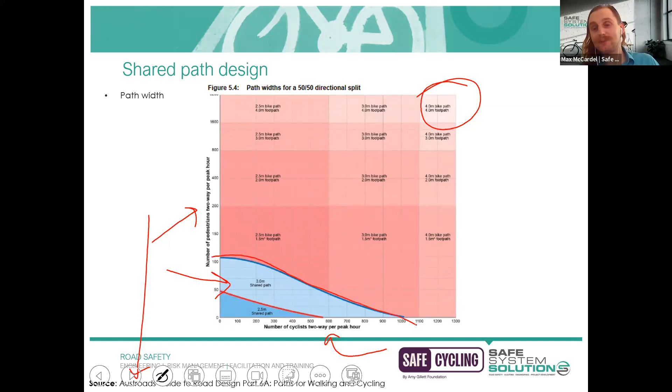Unfortunately, the Austroads Guide does a pretty terrible job at actually succinctly defining what each of these paths look like. There's some generic cross sections which provide some dot points, and I'll go through that, but it really is a little bit open to interpretation. It's not quite as tight as, I've got an engineering background, so I like things to be a bit more unambiguous.

But the local access path, in layman's terms, just think of it as your local streets. If you're considering your road network, it's basically only going to be used to support movement within a local context. So you're not connecting significant corridors, you're not having a large throughput of shared path traffic there. It's likely only going to be for residential use in that specific area.

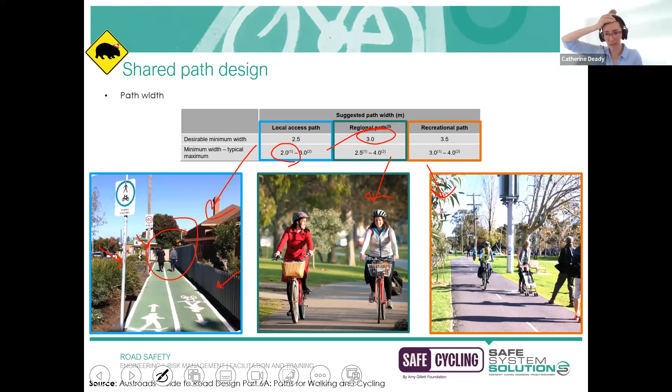Do you know if they do that, Catherine? Do the bicycle detector loops do that? Yeah, I'm not too sure around intersections. I'm sure there are - I mean, we've got obviously the detector loops to detect whether a cyclist is there at an intersection to trigger the bicycle lanterns. But I know MetroCount do a lot of the tubing, permanent tubing, for off-road facilities, so for shared use paths. I'm not too familiar though of them being in the carriageway, so it'd be good to know.

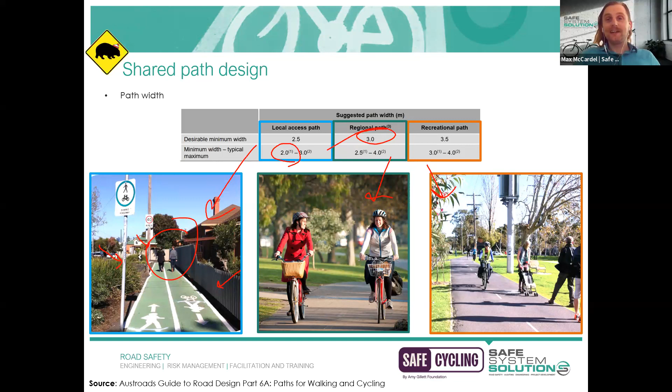Right, okay, got some interesting feedback in the chat as well. So thank you for helping shed some light on that. Thanks, everyone. And that's it, Max. I'll let you carry on.

Thank you very much, Catherine. So we'll get stuck into the gradients now. Once again, this is a figure from the Austroads Guide. And what we're actually looking at is what would be considered a reasonable uphill grade for a rider.

Myself, if you've read the introduction on the LMS, I don't like hills at all. I don't like riding up hills. I will go out of my way, I'll pick a flatter route, even if it means another 15, 20 minutes to my journey, because I just do not have the stamina or motivation to tackle hills. Lots of riders are very different in that regard, but I take it quite easily.

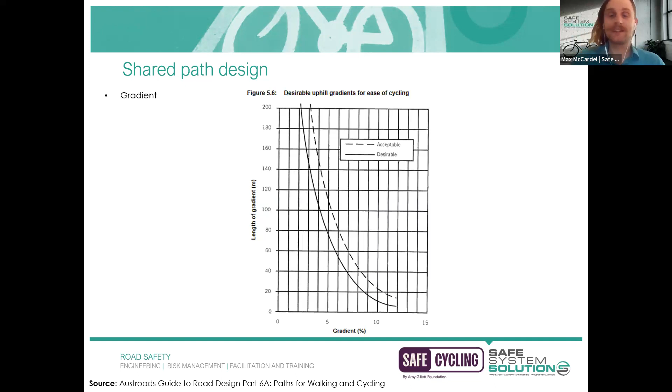This graph basically represents my sentiment, which is how steep can shared path facilities become, and how long can you make that facility before riders just won't use it and it's not worth doing, or you should be looking at flattening that out. The way that we read this is we've got the length of the gradients - the gradient is just the slope, the steepness. Along the X axis, we've got the gradient as a percentage.

I'll just pick one as an example, and I'll say a 10% gradient - that is really, really steep. Like you would notice that even driving a car, 10% gradient is very steep. If we had a 10% gradient, what would be deemed desirable would be to limit that to about 10 meters there. So that desirable line there is the solid line. What may be acceptable is that dotted line, which looks to be around 25 meters or something like that. So that's just giving you an indicative range of how riders would actually feel going up a 10% grade and how much you should limit that, because you don't want to make it too far - riders won't use it, or they have to get off their bike and push it up and things like that.

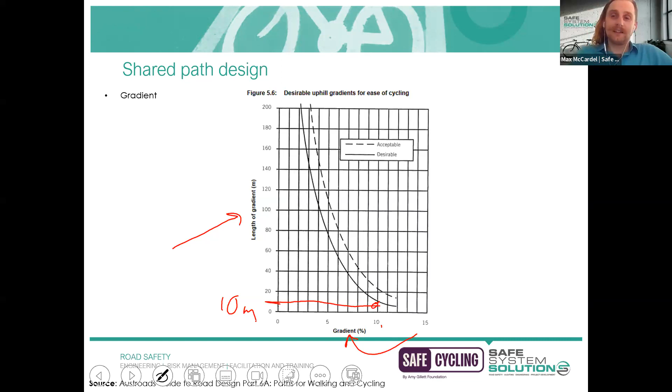That is, of course, thinking about uphill grade, but we also need to think about, well, if it's a shared path, it's very likely that riders will be accessing that in the reverse direction, which could be traveling downhill.

I've given this example here, and I'll give you a chance to provide your feedback in the chat. The question I've got, this is an overpass structure.

Riders travel along here, and if you put yourself in the position of a rider right at this point, just at the top of that ramp, they're going to head down this ramp to continue the shared path.

What are some of the risks or hazards you can see in these photos that may increase the risk of a collision? I'll give you 30 seconds to have a think.

Think about what are some of the risks or hazards for a rider about to set off and ride downhill in this environment. Pop it in the chat, please.

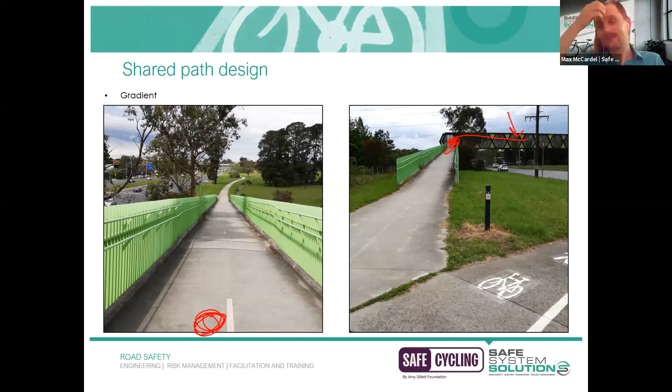So the ramp, if I was to draw this in cross section or elevation profile, it kind of looks like you've got the ramp that goes down, then a landing, ramp, landing, ramp, landing, like that. That's obviously exaggerated.

The reason we do this is for our DDA requirements. We need to provide those for people in wheelchairs so that they can safely access this feature.

Some riders think that significantly affects their ability to travel within there, and yes, if you are riding at speed, it is relatively uncomfortable.

But that's the other point I really wanted to make: if you were at the top of that ramp and just let your brakes go and let gravity take over and push you down there, it's very likely you'd pick up pretty significant speed.

You'd probably be traveling like 25, 30 kilometers per hour by the time you got to the bottom of the ramp, by the toe. A few other people have mentioned that we've actually got a conflict here.

We've got a conflict point here because we've got another shared path that actually joins in at this location. That's not great design, really, because where you've got the conflict point, you don't really want to have those high speeds.

The other issue with this location, and I've also seen this mentioned, is because you've got this lovely facade being used for the handrail there.

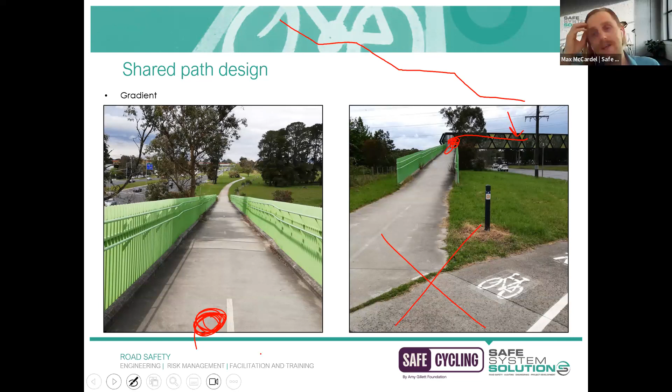That actually acts as a sightline impediment. So as you're riding down, it can be quite challenging to see a rider that could be accessing the shared path adjacent.

It's difficult to make eye contact with them, and also a bit confusing as to who gives way, who's got priority.

So all of those factors lead to this: you've got high speeds, you've got the confusion of priority, and it's difficult to see other users at that conflict point. This is a significant concern.

That is just a testament to thinking about things not just from how riders experience things going uphill, but how they experience things going downhill, which is often overlooked.

This one we actually audited as part of the construction of this project, and it looks different now. A recommendation was made to actually move that conflict point further out, where sight lines are much more open.

Where you've got much reduced speed, because you're no longer putting the conflict point where riders are right at the bottom of the downhill where they've got all that speed.

You're putting it somewhere where they've managed to wipe off some of that speed. So those are just ways that you can look to mitigate that, making sure you've got your sight lines set up and hopefully reducing your speeds.

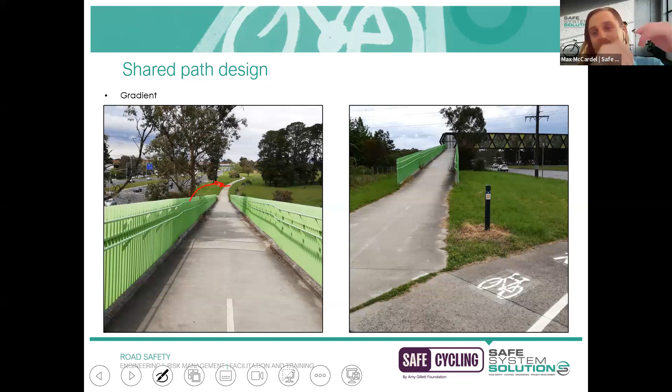Now I'll have a chat about our cyclist envelope. Just like in traffic engineering or road design, we have envelopes for general traffic, heavy vehicles, buses, B-doubles and so on - by envelopes I mean the width they need, how much space they require. We also have that for riders. The operating width of a rider is conveniently taken as 1 meter, so it's pretty easy to remember.

However, there's a note that if a rider is traveling uphill, they're likely to take up more width, because it's common for them to wobble their handlebars left and right to get momentum up the hill. So that operating width may extend to 1.5 meters, but generally as a rule of thumb, the 1 meter operating width is used.

In terms of clearance - the head clearance from the top of the rider to a fixed permanent object - 200 millimeters is used. This is from New South Wales; depending on jurisdiction, others may use 500 millimeters, so there's a bit of discrepancy depending on which part of the country you're from. Where this is most relevant is scenarios like a shared path going underneath the carriageway, an underpass type situation, or even vegetation and branches overhanging a path - that measurement helps identify any risks there.

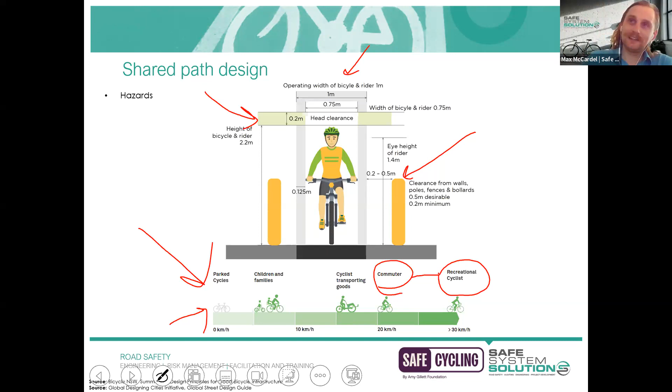Back to hazards - I mentioned that 0.5 meter offset from the edge of the rider's operating width. Looking at the right photo, in practice it can be difficult to say exactly where the operating width of a rider is on a shared path. The way we tend to measure it in practice is we take the edge of the shared path.

Anything that's within 0.5 meter that's fixed, that's rigid, that could be a snagging hazard, we consider that a risk for our riders. So this utility pole that is conveniently masked by vegetation is in a precarious position for riders, because if a rider loses concentration and strays off the path, it's very likely they would strike it or hit their handlebar and snag on it, potentially causing injuries. That's how we measure our half meter to determine if it's a hazard or not.

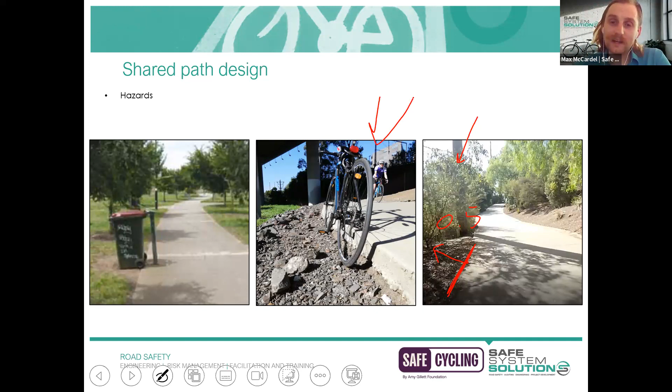Some other really common hazards we see are drop-offs. This is an example of a concrete shared path that's been installed. Likely the contractors used formwork to get the concrete nice and level, then took away the formwork and that's it, job done. Unfortunately that leaves a drop-off where riders who come off the path are very unlikely to safely access it again. Instead, we recommend always battering up to the surface, meaning using soil or fill material to build up to the top of your concrete path so there's none of that drop-off.

I've done this the other way, started from right to left. But anyway, the left-hand photo now is a bin, which is also regularly found across recreational paths. A really good example of where we could have done some analysis and thought, well, maybe I'll put the post on the other side here, just to give riders a little more leeway so they don't have to worry about that one as a hazard.

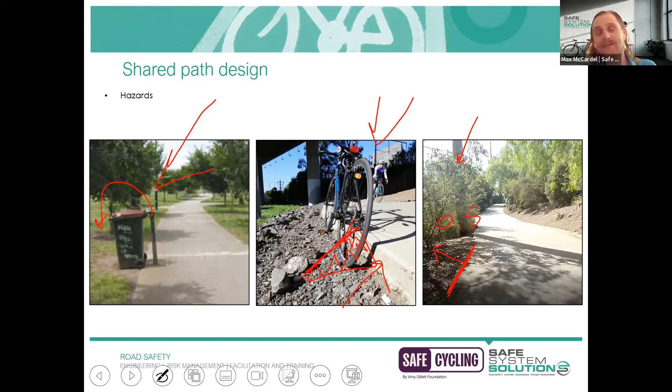Taking into account the hazard I looked at with the utility pole, a way that we could treat that—if we're able to remove that as a hazard, that is our primary approach. If we look at how we mitigate risks, anything that removes the hazard is considered the best outcome. But it's also not uncommon to apply flexible bollards or use line marking just to help demarcate that there is a hazard there.

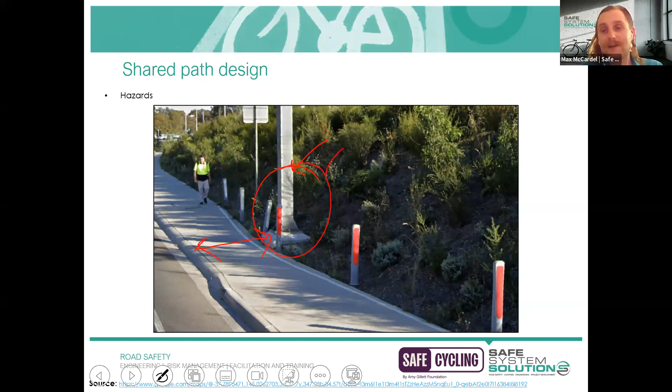This is another example where the shared path is narrowing due to this gantry sign post that hangs out of the carriageway. Once again, in an ideal world, during the design phase you probably would have picked this up—the shared path has to narrow there—and thought, well, let's push this feature into the embankment and build some retaining walls so we can keep that nice consistent width. But if you're working within environments where you're just retrofitting and trying to make things a bit safer, these flexible paddles or any delineation device help demarcate that.

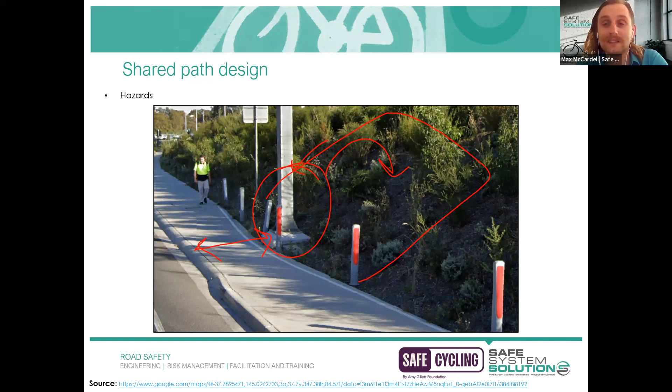We'll move on to sightlines now, and I've put this little slide in here for those who are in the design space, and perhaps you've done your sightline calculations for other modes, like stopping sight distance for general traffic or minimum sight gap distance, all those fun calculations. So just wanted to make you aware there are sightline calculations for riders as well, and it's a very similar process for how the calculation comes about.

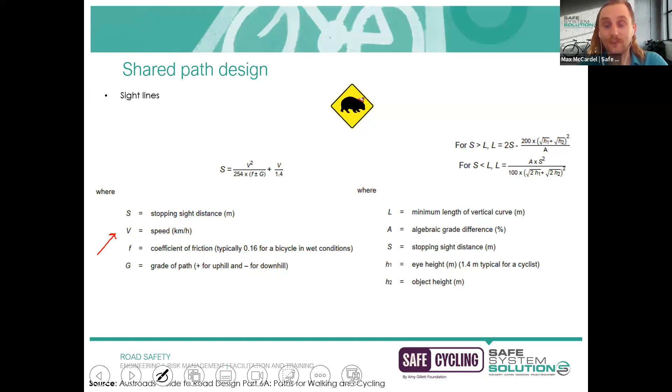You need to know or make assumptions about your rider's speeds, take the worst case scenario for friction, which is during wet conditions, and then the grade of the path. This gives you your horizontal sightline requirements, so you can determine how far a rider needs to see in advance to spot a hazard, and how much space you should provide adjacent the shared path and remove obstacles to ensure that sightline check is maintained throughout a shared path corridor.

Anecdotally, these checks tend to be done at the highest risk locations, maybe like hairpin bends and things like that, and it's pretty common that they're not met. So you'd have to think about what else can I do to help, if I'm not going to be able to meet sight lines, what else can I do? Maybe that's slowing down riders.

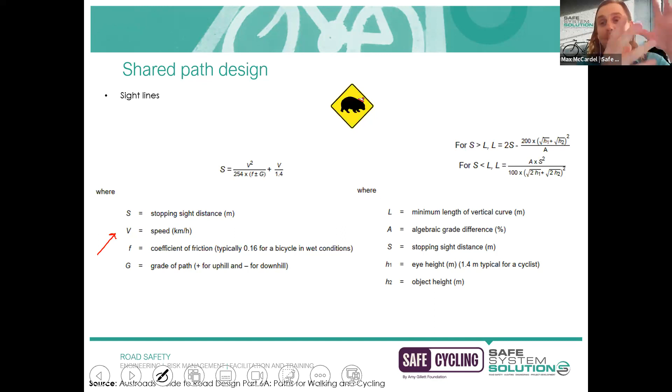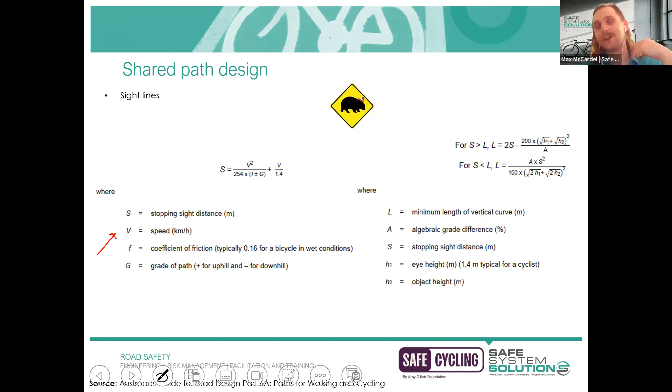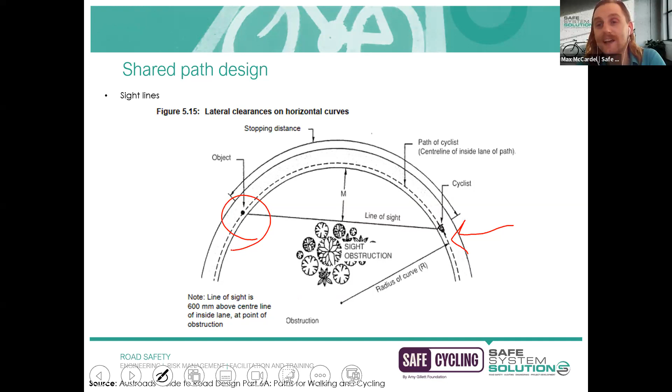But just to talk about this against a figure instead, to give you more appreciation of what I'm on about with sight lines: if I've got a rider traveling on a shared path, I could have a hazard or object blocking that shared path. It could be a log that's fallen down, or another rider that's fallen and injured themselves. What we don't want is insufficient space for the rider to emergency brake and stop prior to colliding with that hazard. We want to ensure the sight lines are there so they're able to perform that safely.

So if there was a significant hazard occurring around here, a rider could be traveling along and only spot it halfway around the bend, limiting their ability to stop in time. So they might have to run off the path or collide with that hazard. That's the reason you're doing this check, just to ensure that you've managed to mitigate that as a risk.

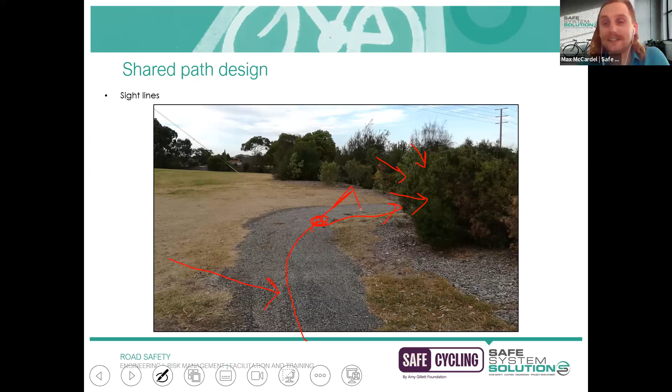I'll spend a bit of time now on fencing. We'll talk about two different types of fencing categories, referred to within the Austroads Guide as a partial barrier fence or a full barrier fence. We typically apply them either when we've got a significantly steep drop-off, like a vertical drop, or there's a really steep batter, like a cliff.

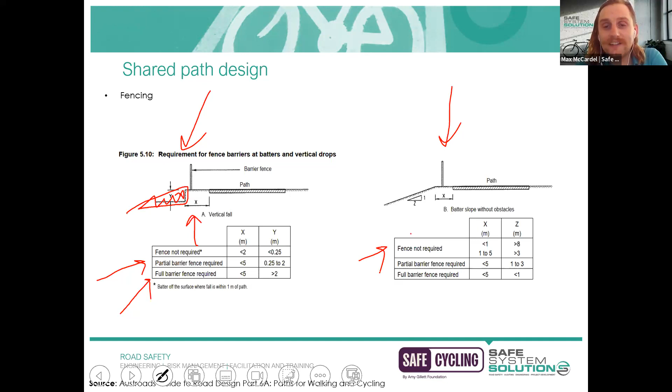Similarly, I'll run through how we read our battering fence requirement table. A fence is not required where X is less than 1 and Z is greater than 8. Z is referencing the run. For those who remember their gradient calculations from high school, or have done any batter calculations, you know it's a rise-over-run terminology, usually referred to as a 1 in 10 grade or similar.

Basically, if it's greater than 1 in 8, it's pretty flat, so don't worry about putting in a fence. A partial barrier may be required where Z is 1 to 3, and if it's 1 to 1, that's very steep, then you would require a full barrier fence.

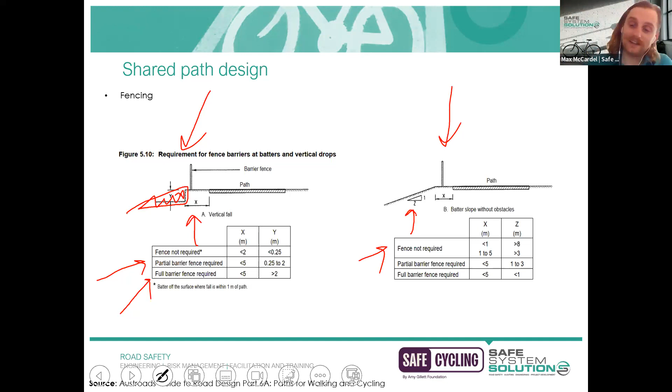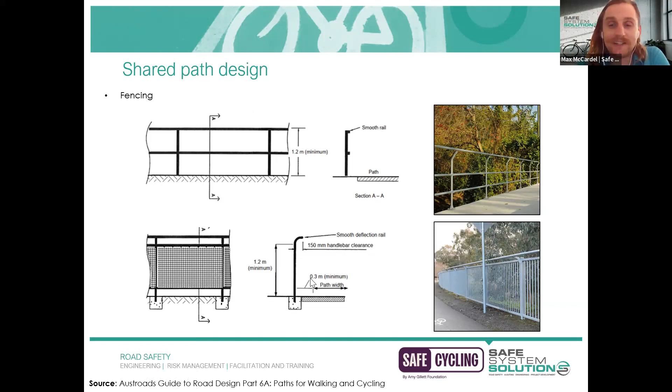The other thing that's really crucial within any fencing design is this smooth rail, which you can see listed in both cross sections as the smooth deflection rail. This is a deliberately installed continuous rail that juts out in front of the fence, so riders' handlebars don't collide with any of those vertical members or brackets. In fact, it's designed so that for a rider on their bicycle, that smooth deflection rail sits at the height of a rider's elbow to shoulder. This means that if they were to come off the path and collide with this feature, that part of their arm would hit the fence, making it much more likely they'll stay on their bike because their handlebar isn't snagging.

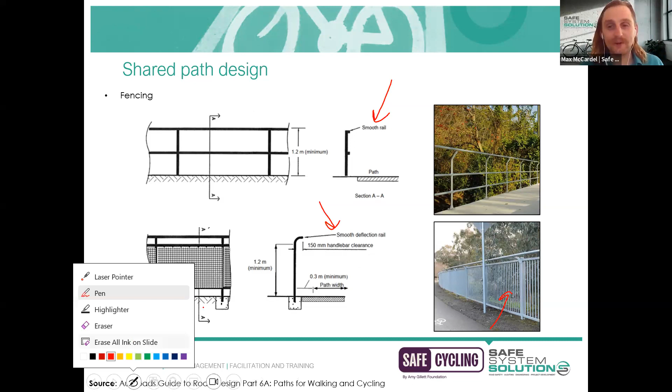So very important: any fences that you're proposing adjacent to your shared path would have that smooth deflection. I saw it in the chats, but note here that the sign has been installed on the inside of the path, meaning theoretically, if you were riding and collided with the deflection rail, it's basically going to guide you straight into that pole, which is not a good outcome. So if you're doing this type of work, just ensure that sits on the outside of your fence, so you don't have that pinch point for riders. Give a prize out there for the person that noticed that - that's good eagle vision.

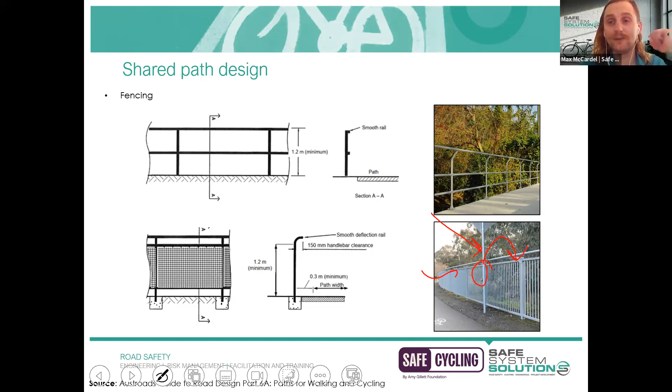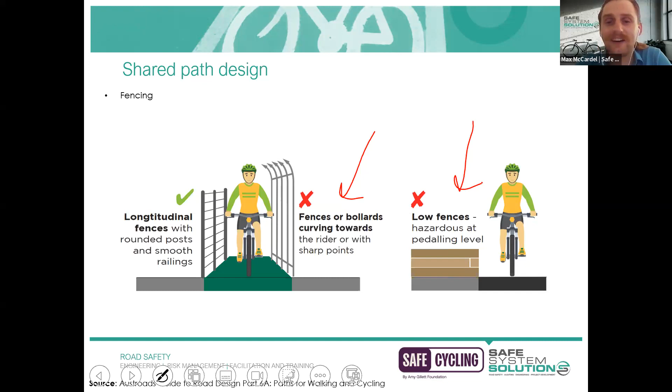Now, longitudinal fences - we've already spoken about this, this is just more of a figurative way of looking at things. We don't really like to see any fences that curve inwards. They can also have that head clearance issue, and anything sharp, obviously. Low fences or things like planter boxes can actually create a pedaling risk where riders' pedals strike that. Anything above 200 mil could become a pedaling risk. So be mindful, if you've got any of those low features, they could be considered a hazard as well.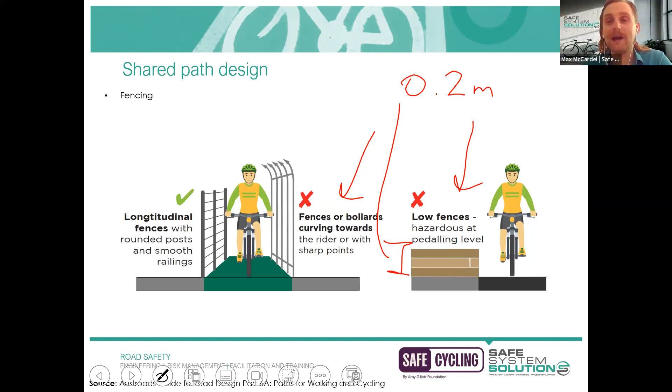I also saw a question in there about the shy line effect. Was that you about to ask that, Catherine? Yeah, that's it. I stole it from you. Oh no, all good, you go for it, Max. It's a good question, hey? We'll give a prize out there as well for the shy line effect.

So what that refers to is - maybe I can draw it on this image - if I was riding close to the edge of the shared path near the fence, it's very common for riders to deliberately position themselves further away because they don't like the feeling of getting too close to this feature. We have the same phenomenon with drivers when a roadside barrier is installed too close to the edge of the traffic lane - they tend to position themselves over towards the center line more. Same thing happens with bicycles. The way you mitigate that risk, similarly to what we do with roadside barriers, is by providing a splay. So a splay would mean - pretty difficult to draw on this image - but if you had a shared path that looked like that, and that's the fence you're proposing, at the start or end of your fence you'd splay it so it looks like that. It provides a more comforting angle for riders. Great question though.

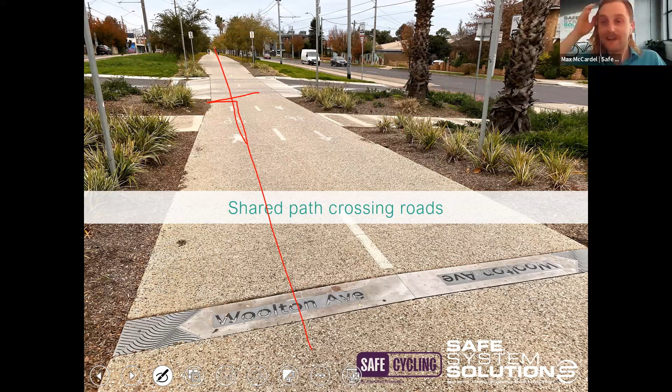So if you're riding through this section, you're not forced to pause and give way to traffic — you've got one continuous stretch. This is about a 2-kilometer stretch of bike path that looks exactly like this, and at every opening you have that continuous riding facility, so you're not forced to yield. In other sections you are, but not this one. I think that's a wonderful way to design it — provide continuity for shared path users, because it's much easier for vehicles to slow down and give way than for riders to do so. It's cumbersome, and some riders may try their luck while others just decide to use the road because it's too inconvenient.

So I've got two other examples here of shared paths crossing over roads. I'll call this one example number 1 on the left, and example number 2 on the right. I prefer example number 1. They're both raised crossings, and both give priority to shared path users, but my preference is example number 1.

I'd like to hear in the chat why you think I'd recommend configuration number 1 over number 2. Have a look at both examples and pop down your thoughts on what could be considered more or less risky in either of these. I'll give you 30 seconds.

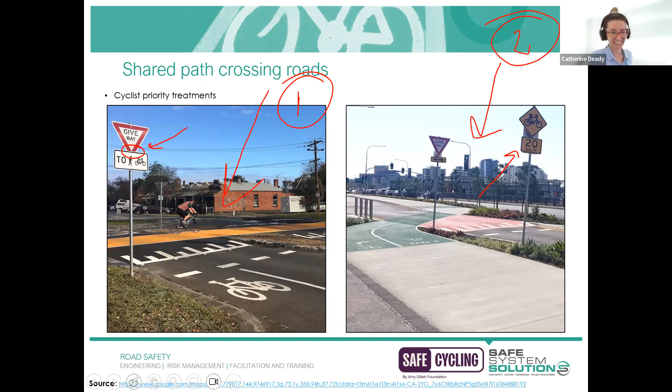Good to have that feedback. So yeah, the way things look — two different jurisdictions, as I mentioned before. The one on the left is from Victoria, the one on the right is the Brisbane Bicentennial Bikeway. Two different states doing different coloured treatments and things like that, so I wasn't focusing so much on that.

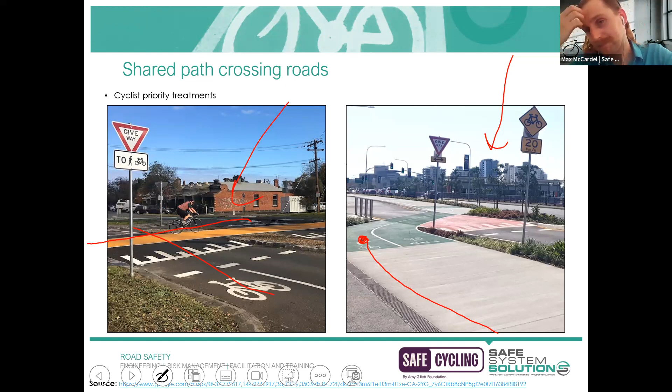So if you are able to construct your conflict points at perpendicular angles and really open up those sight lines, that's definitely the recommended, the go-to approach. Now, I'm not trying to throw any shade at all to Brisbane or this bike path. I know this one quite well, and they've done lots of exciting things. I know in this particular environment they've got lots of different constraints, so I didn't want to say this is the worst thing ever and you can never do this. I just wanted to show why those sight lines can play into how effective these types of treatments are. But they both principally do the same thing of awarding priority to shared path users.

Okay, now another thing that we commonly see where we have shared paths crossing over roads is, of course, bollards. Bollards are fixed hazards that are placed on the shared path or adjacent to the shared path to deter vehicle entry. There's lots of different configurations out there as to what bollards may look like. Where you've got really tight restrictions like this, they tend to be installed where municipalities or LGAs are concerned about things like monkey bikes or dirt bikes entering that environment.

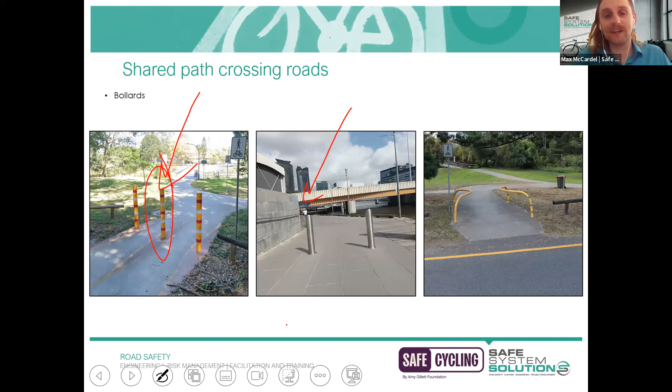The other thing that I really dislike about these ones in particular is they are well and truly away from the carriageway. The reason these have been installed is to limit maintenance vehicles, so maintenance vehicles don't go any further. They can come and pick up a bin that's located over here, but they don't go any further. I just think a much more elegant solution is, rather than have these installed here, just talk to the contractor that's doing this and ensure they've got it in their SWMS, or how they operate their standard practices, that they're not traveling beyond their scope, or even geofence their vehicles so they're unable to access any further. We've got this technology. But anyway, bollards seem to be a really, really common way to just quickly put up and call it job done.

Banana bars in Brisbane, as far as I'm aware, are being ripped up. They're no longer being installed, and they're getting taken away because of the kind of pinch point awkwardness there for riders. Not a great outcome at all.

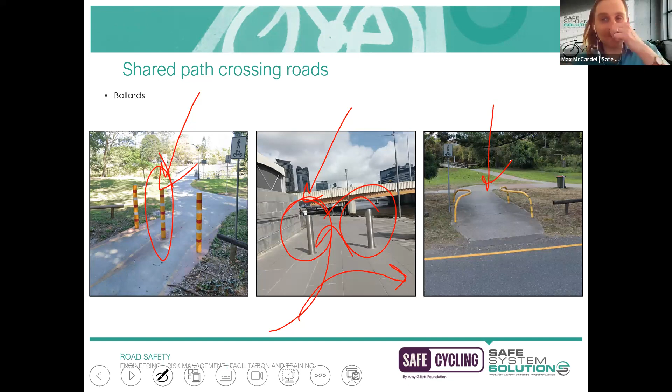A few other types of bollard treatments, things like timber bollards. Once again, you've got that blending in with the surrounding environment.

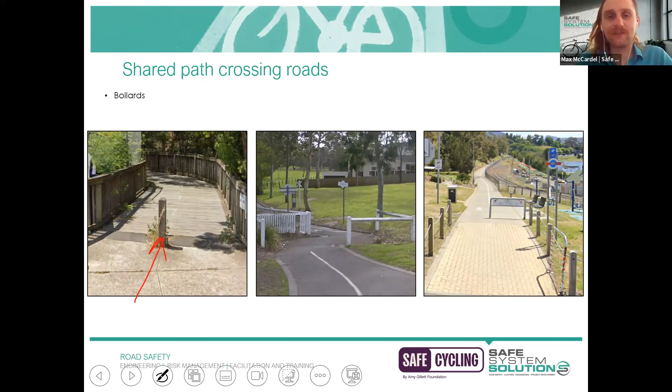You've got this type of treatment, which is kind of... I forgot the word. If anyone knows the word for it, you get a prize immediately. It's the chicane. Thank you. We'll give a prize for that.

That's excellent, a chicane type of treatment, which does a really, really good job at slowing down riders and making them aware that they're coming up to a carriageway. It does a wonderful job at preventing vehicle entry. The issue I've seen with the installation of these chicane treatments is sometimes they can be quite narrow, like the gap in between those two transverse bars there.

And for those who use cargo bikes, or bikes with a trailer, riding with your toddler or your pet dog or whatever it is, those kinds of larger bikes can actually have difficulties traveling through these types of things. So it's just something to be mindful of.

Another common one, this one's in Hobart, is the use of U-bollards, once again just indicating that riders are coming up to a carriageway and to be mindful, but also creating this pretty awkward pinch point.

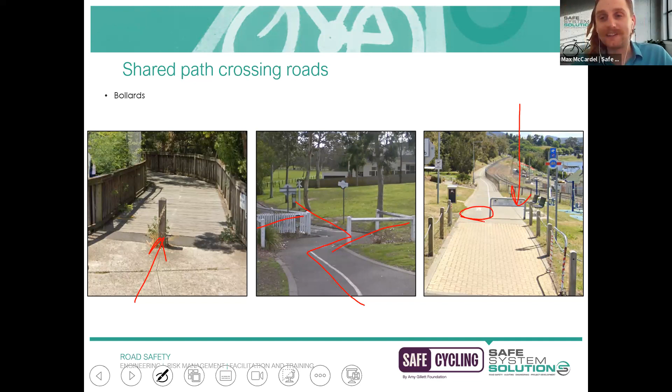Anyway, I wanted to put into a bit of context why I'm talking about bollards so much. This is a photo of a bollard that was installed on the Upfield bike path, which is right near our office. This was many years ago now, or 4 years ago now.

And that was what it looked like prior to this fellow riding into it. After he rode into it, a few days later, council went out and gave it a fresh paint job and some new tape. You can even see the fresh paint on the pavement there.

Anyway, Andrew here, he rode into this bollard on his way home from work, and he suffered facial injuries and broke his arm in 3 places. As he was waiting for the ambulance, he called for urgent treatment.

As he was waiting, which took about 40 minutes, he witnessed 3 other riders hit that same bollard in that period. We have a police report for one crash because that rider went to hospital, so we do have a record of that occurring. The other crashes we do not know occurred other than anecdotally.

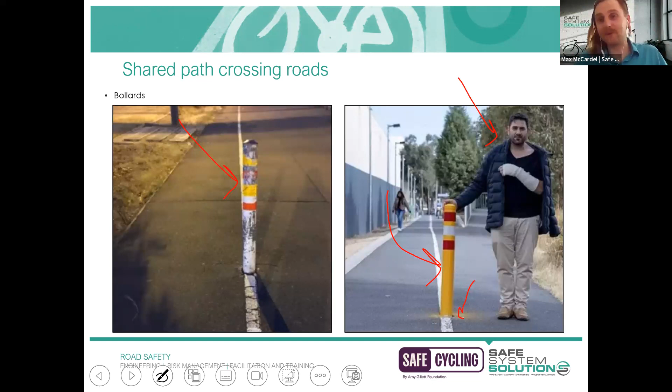I think that paints the picture that these are actually hazards. We would never, ever put fixed hazards in the middle of traffic lanes and just say you should have seen it. But we've kind of got that philosophy on our shared path network, and we should be thinking a bit more principle-based about whether this is really the correct solution, and what's the risk of putting it there versus not, versus potentially having a vehicle access that space.

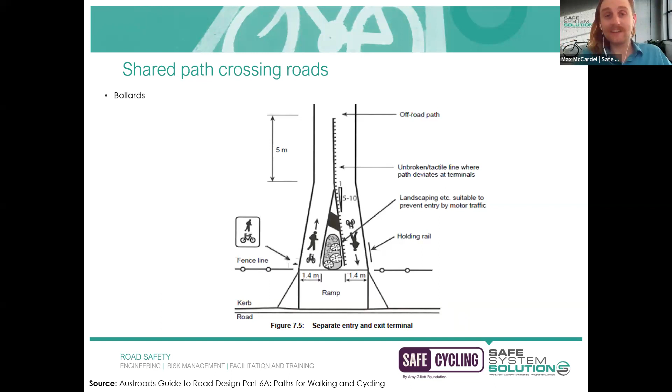Now, other alternatives that you could look at is something that looks like this. I welcome any submissions you may have that generally look like this arrangement. This is very much similar to how we would treat a local road approaching a main arterial road.

That's installing a humble splitter island. You could use landscaping, or you could even put a bollard in that central island treatment, assuming you've got those half-meter clearances and things like that. This provides a very distinct visual cue to riders that something is occurring, particularly if you've got line marking running up in advance of that potential conflict.

It also does a very good job of ensuring that vehicles are not entering that space, using landscaping as opposed to just a big metal pole right in the middle of the path. So I'm a big fan of this. It's been in the Austroads guide for, I'm going to say 15 years or so, but I struggle to find really good examples of this being applied in practice. So if you know of any, please send me an email.

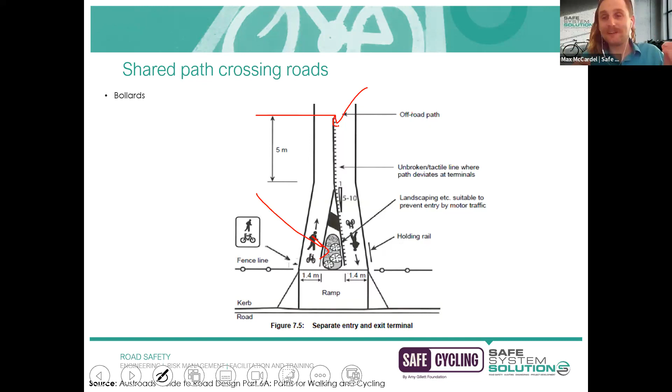I've got this one, which is kind of doing what I'm talking about here, but yeah, to some extent not, which is using a bit of grass to help demarcate those two different legs of the shared path, so you don't just have riders in opposing directions riding into each other.

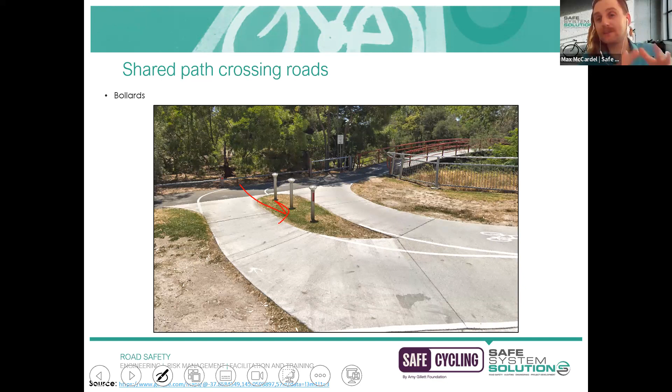It is using bollards, but managing to maintain that half-meter offset, reducing the risk of handlebars striking that or anything like that. The other reason I really like these bollards is they've actually got a solar panel on top, and when the sun sets at night, they illuminate and cast a lot of light, so it's easy to see both during the day and at night. I think that's a pretty sensible solution.

The reason why I'm not so convinced about this one is because if I was a vehicle and I really wanted to access that space, I could quite easily just go around that kind of stuff. But anyway, if you do know other examples, please do shoot me an email.

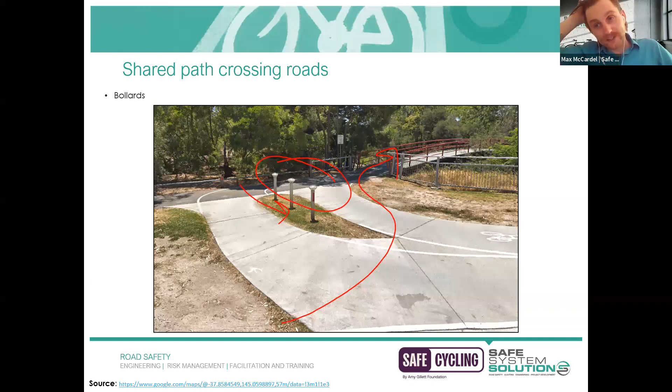I just wanted to mention also about our DDA requirements. DDA, for those unfamiliar, is the Disability Discrimination Act, ensuring that because we're working within the public realm, we are not discriminating against anyone with disabilities, people with vision impairments, people in wheelchairs. All of those requirements are still applicable to our shared path network, and we need to consider those things as we are designing and constructing it. In particular, you may be thinking about TGSIs.

We may be installing them on approach to the conflict point. The TGSIs are just those little hazard markers, so people with vision impairments or blindness can feel like the braille as they approach the conflict point. Those types of requirements are still necessary, so I just wanted to make everyone aware of that one.

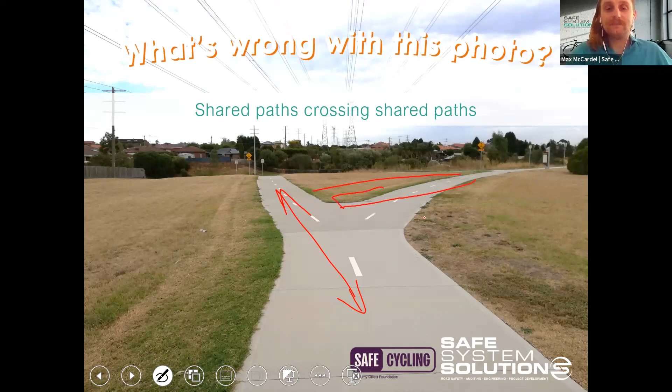The other relevant topic I saw coming through is the lack of clarity around who has priority. To demonstrate, if this was the main route or thoroughfare, you'd ideally try to square up this intersection so it looks more like this, and fill in this section here. You'd put a stop sign facing shared path users in that direction, so it's very clear that if you're riding on this path you've got right of way, and if you're coming up the other direction, you need to stop or give way to shared path users on the adjacent path.

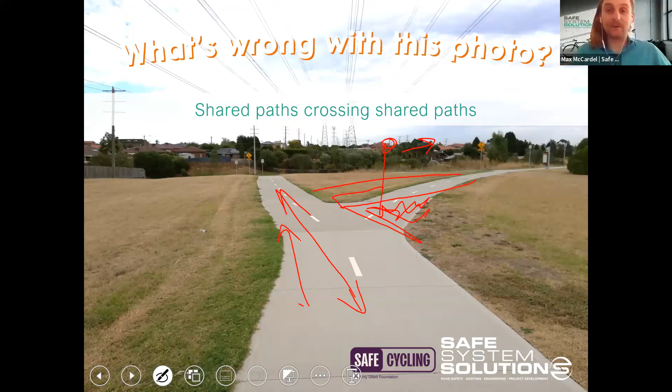Very good point. But the wayfinding I wanted to mention in particular, because Austroads have actually completed a research report on that topic specifically, acknowledging that Australia and New Zealand have a bit of work to do in that space, and there are other jurisdictions we can learn from.

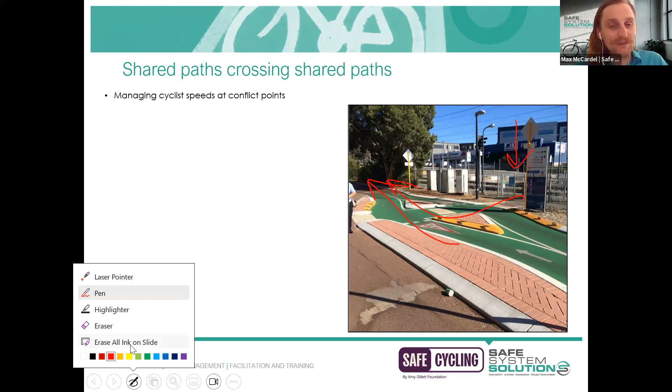The way that they've engineered it here in Perth is they've used some curb and channel, done some splitter islands, coloured the pavement, and done a little give way pavement marking as well. All of these features are really designed to enhance cyclists' appreciation that something's changing about this environment. This does not look like the other parts of the network, and I should alter my behavior accordingly.

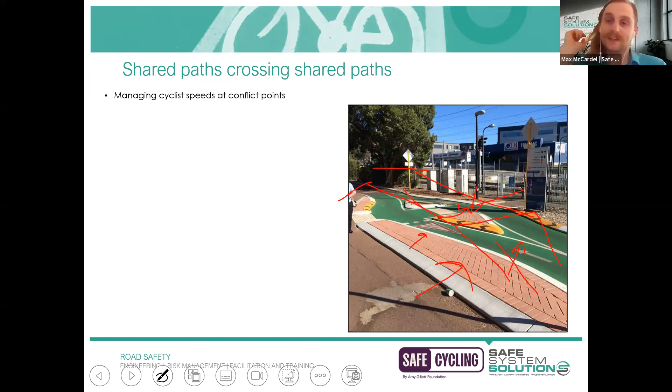I think another way this perhaps could have been managed is through the use of a wombat crossing, actually raising up this area here. It's quite crudely drawn, but kind of like a speed hump. Riders hit this ramp grade, and that physically slows them down. Then as pedestrians access this space, you've got riders traveling at a lower speed. Wombat crossings are used across bike paths, so I've got examples of that if you're interested in seeing it, and they can be used on shared paths as well.

Another way we tend to see these conflict points being demarcated or acknowledged is through the use of different pavement markings - this slow down marking, since pedestrians are going to be in this space. I have not seen any research about how effective these types of treatments are, and I wouldn't expect they do a great deal, because by the time a rider actually sees these things, they're already on top of it, likely too late for them to actually slow down, or they're traveling at speed and it's just another distraction that's not really processed. So it looks like some effort is being made, but I'd be surprised if there's actually any change in behavior or rider speeds from installing things like that. But if you know otherwise and you've got some data, feel free to correct me.

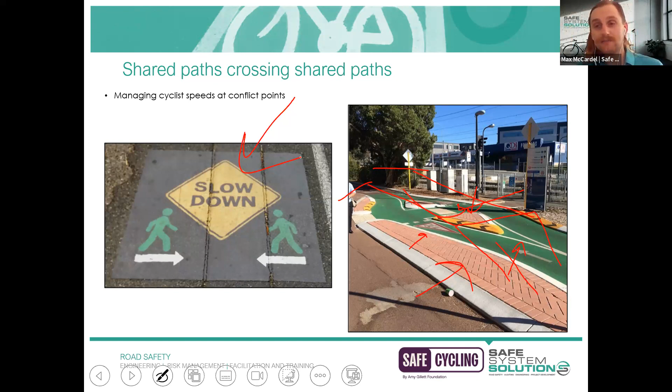That's right, I was laughing when you mentioned me knowing that area, Max. But yeah, it's certainly busy in the peak times, in the morning and afternoon when people are going to and from their workplaces. I guess certain people would see that as being over-engineered, but there certainly needs to be some clarity around who has priority, because at those peak times, it's pretty hectic. Bringing back memories, huh? Yes, certainly is.

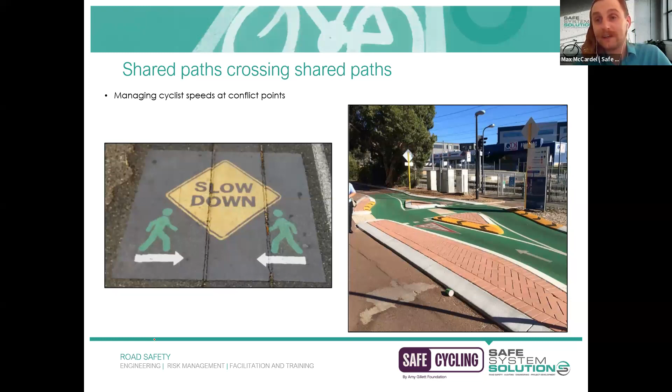There was just a bit of a mention around using tactile pavement, which creates that vibration as you roll over, as a bit of advance warning for cyclists. I know that tends to get used - it's a good question, I'll pop in a slide in our next module where I'll show an example of that, because I tend to favor that kind of solution more than just pavement marking. I think that can provide a very clear warning to riders that they're approaching a different environment.